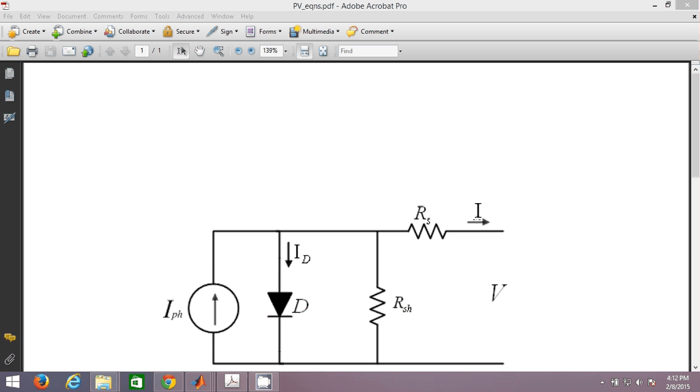So this is the equivalent circuit. As you might already know, this is the current which is generated by the PV cell, the photocurrent, photovoltaic current, and this is the diode which is a representation of the PN junction of the PV cell. So this is the diode current ID, and these are the shunt and series resistances, RS and RSH. These two are approximated resistances of the body resistance of the PV cell, and I and V are the terminal current and voltage.

So here are the basic equations you must know before proceeding to the design of the PV cell in MATLAB. This is the main equation of the current. The total output current I is given by IPV, the total current supplied by the PV cell, minus the diode current, and also minus the shunt current, so the remaining current will be I. Vt is given by Ns into kT by q. k is Boltzmann's constant, T is the temperature, q is the charge of an electron.

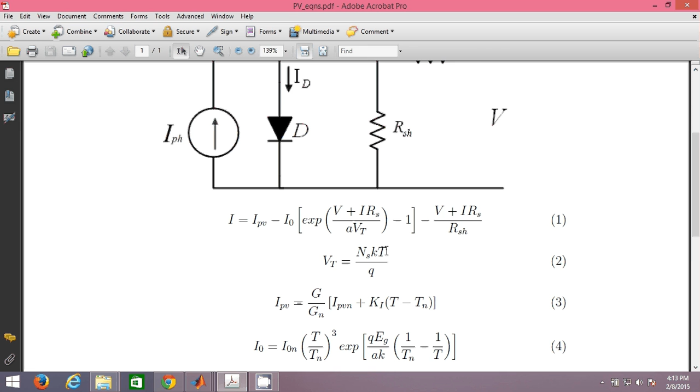IPV is given by this equation, I naught is given by this equation, and I naught n is given by this equation. All these equations you can find in any standard paper on modeling of PV cells. Once you have understood all these equations, you can start writing them in the M file. So this is the M file in which I have tried to write all these equations.

First I have written all constants: k, the Boltzmann's constant, charge of electron, short circuit current, which is given on the panel, open circuit voltage, Kv and Ki, the voltage and current constants, and the number of series cells connected. This is the operating temperature. 25 is the nominal, and this is the operating one. You can change it to 35, 40 or 20, 30 later on.

And this is the nominal irradiance. This is the ideality constant of the diode. This is the band gap, and this is the operating irradiance. You can change this to 1200 or 800, 600, whatever you want. These are the series and shunt resistances. You have to calculate these; they won't be given by the manufacturers.

I've put the equations in this form, Vtn, and you can compare all these equations. I naught n is given by Isn by the exponential of this, and I naught is I naught n into T by Tn whole cube, times the exponential of this. All these equations I have written here. And this is the I vector. I have initialized an array, and I have initialized it with 0.

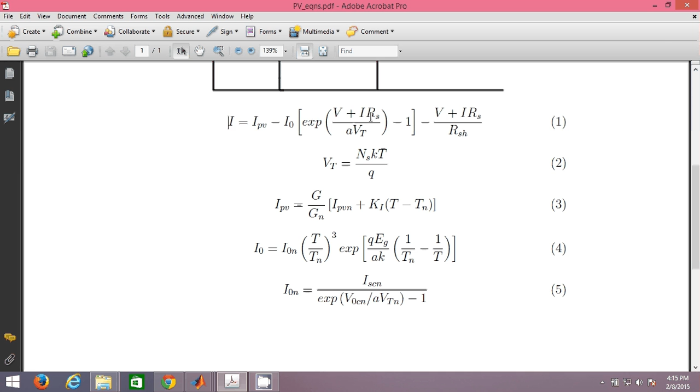The first element I have made 0 because, as you can see in the last equation, IPV, I naught, everything we can calculate. The only things left are V and I. I is on both the right and left hand side, so you have to initialize I with some value so that you can use it to calculate the next values. As we know, at open circuit V is 32.9 and I will be 0. So the first time I put I as 0, and V you can start from the open circuit.

You can start from 32.9 and reduce it by 0.1 down to 0, so that you can plot the complete VI curve from open circuit to short circuit condition. So this will be open circuit, this will be short circuit, and this is the I calculation, IPV minus this equation. You can see the first equation, IPV minus this term, which I have calculated separately here. So I will be calculating and storing this.

I set the index to 1 and increase it, so that in the I vector I store the values of I, in V1 I store the voltage values, and in the power I calculate V into I at every instant. So at the end of this loop, the P and V1 vectors will be one value less than I. So in order to make them equal, I have added the last term once more.

So I've made a transpose here so that we can plot it easily. So I'm plotting here V1 and I. Now you can see if I run this, this is the VI curve of the PV cell as expected. So this will be the short circuit condition, this will be the open circuit condition. So there the voltage is 32.9 and here the current is 8.21. So this is the VI curve of the PV cell.

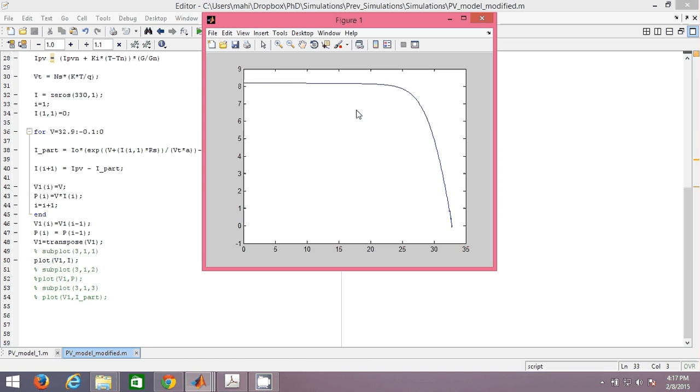So now if you want to plot the PV, you can simply remove this and include this PV. So plot V versus P. So this would be the PV curve of the PV cell. So this maximum power is around 200 watt here, at around 26-27 volts. So this is the voltage corresponding to maximum power. And so this is how we can generally use the mathematical modeling of the PV cell to plot the VI and the PV curve for the PV cell.

So now if you want to convert this to a Simulink model, there are two ways of doing this. You can either write the equations directly in the Simulink blocks, or you can use an embedded MATLAB function, and write your function inside it. So here instead of putting the loop inside this M-file, you are going to put the loop outside, so that you calculate the value of V and I every time, and you will be plotting the XY graph in order to plot the PV and the VI curve. So for doing that, this repeating sequence just acts like a loop, just like the for loop we have done.

So similarly, this lookup table is going to generate a value of voltage for every value of this. So this voltage I am going to give, and the current I am going to get. This requires some pattern. That's what we have done for the loop, voltage from 32.9 by 0.1 in decreasing order up to 0. So that's what we have to give to this loop, then only it is going to work. So for the lookup table, if you open it, these are the breakpoints 1 to 330. These are the points I have given, and based upon these it is going to access the values. So now if I run it,

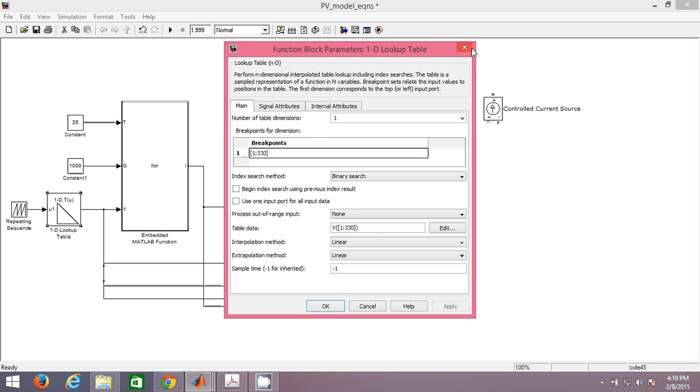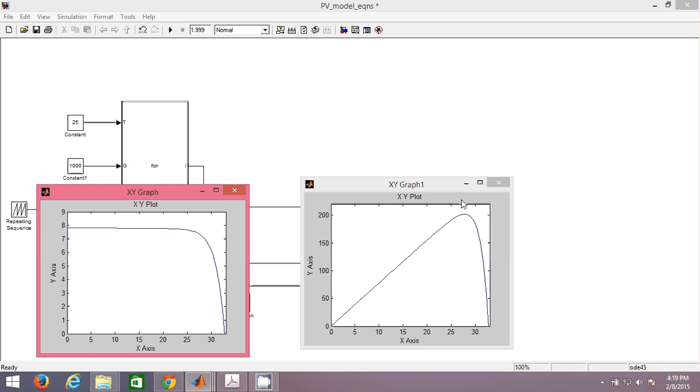it is asking, but you can remove this, this is not required for us. So now you can see the same VI curve and PV curve for the same PV cell. Later, if you want, you can use a controlled current source, which I have just removed. Connect this I to the current source, and at these two terminals you can start connecting your normal electrical components like resistance, inductance and capacitance, whatever you want. And you have to use a powergui block whenever you are using these kinds of electrical elements. This block is a must. I think you already know this.

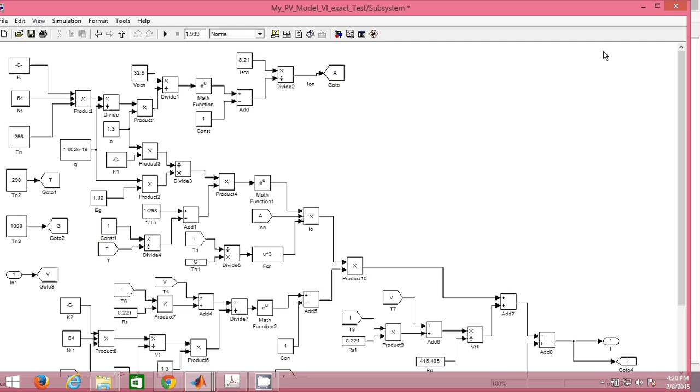So this is one way of doing it, and the other way is to directly write the equations in terms of blocks. I put all the equations in this way so that you can do the simulation. Both ways are the same. So here this block represents the PV cell, the same block which we have seen just before. Here I have connected this controlled current source, and I have connected a resistor here, and this diode is an extra diode. This is not the diode which we have seen in the one diode model. This is different.

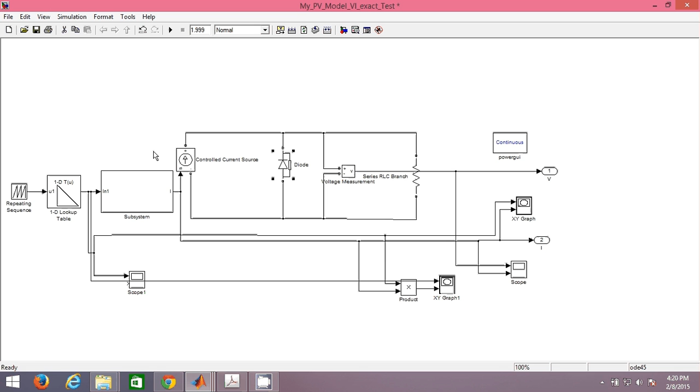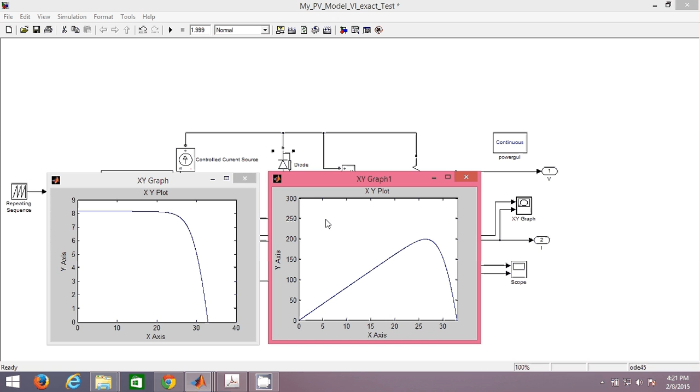So now if you run it, you can see this is the VI curve and this is the PV curve. So it is also giving us the same result as expected, just as we have seen for the different cases. So this is the way you can either simulate or mathematically implement it. If you want to check for different irradiations and different temperatures, increase the temperature and see what you are getting. See, it is varying, distorting, but it should not. So there may be some errors, you can go through and check all the cases for your future work.

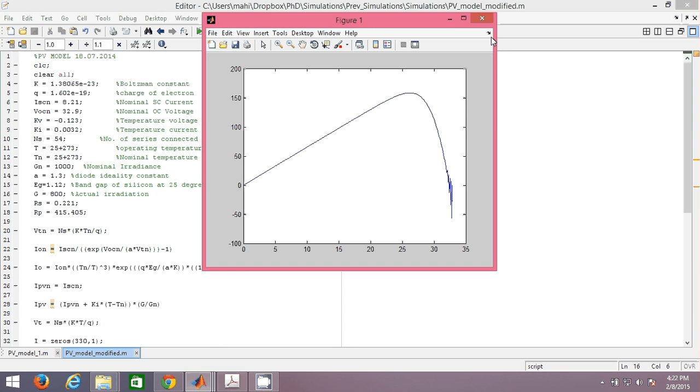Now I'm increasing the irradiation, let us see. So the power is slightly increased. Previously it was 200, now it is 220. You can increase or decrease the irradiance. I'm decreasing the irradiance, and see the power is decreased, it is around 150-160 now. So similarly you can increase or decrease the irradiance and the temperature in all models. So this is how you can actually model or simulate the PV cell.